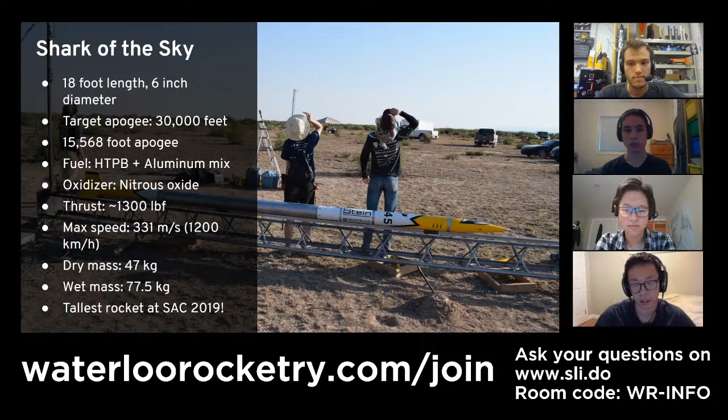At peak, the engine produces about 1,300 pound thrust, which gives it a max speed of just short of Mach 1 at 331 meters per second. It has a dry mass of 47 kilograms, which is when the rocket is empty without fuel or payload. And at launch, it has a wet mass of 77.5 kilograms. And just as a fun fact, out of over 100 rockets at Spaceport America Cup 2019, Shark of the Sky stood the tallest. So now I'll hand it off to Shirley to give you a more in-depth view of the rocket.

Yeah. So this is just to give you guys an overview of what sort of systems we have on the rocket, because we will be referring to the different systems we have on the rocket, and this is to help you visualize that. So at the bottom of the rocket, we have the fin can, which is essentially the assembly with the fins. We have the combustion chamber, where all the propulsion magic happens.

The feed system, which connects the oxidizer tank to the combustion chamber. So the oxidizer, nitrous oxide, flows through that section once it's time to launch, and we ignite the engine. The oxidizer tank holds the oxidizer. It is both a pressure vessel and also a structural component of our rocket.

The vent system. So this system is located at the top, and we use it to vent the system when we're filling, or if we need to make a launch abort, then we need to vent the system and safe it so that people can approach. The payload is, we will talk a bit more about it, but it is a science experiment, and we have a really interesting one for this year.

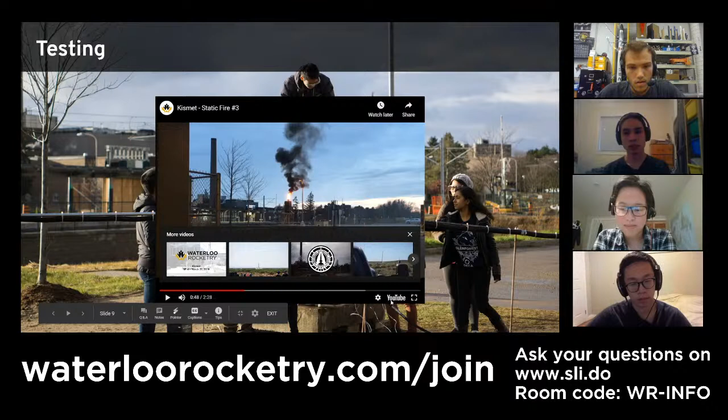Roman, just let me know when you're done playing the video, because there's a bit of a delay between what I'm seeing and what everyone else is seeing. Okay. Next slide, please.

Open injector valve in 5, 4, 3,

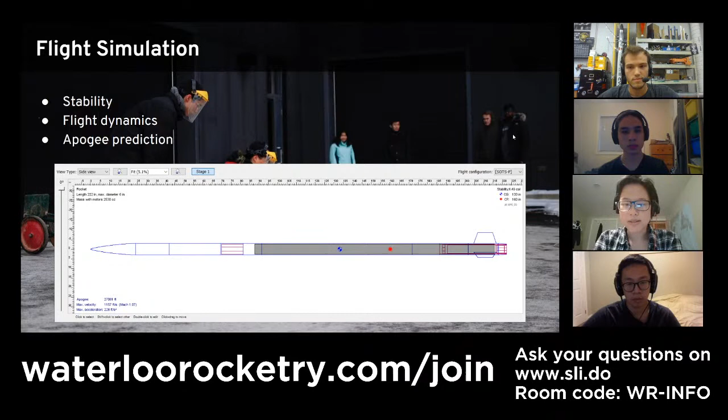Lastly, apogee prediction. So as Ryan touched on earlier, apogee prediction is a really important judging criterion for us at competition. And there are a lot of parameters that can affect this. For example, the weight of the rocket, the weight distribution of the rocket, the aerodynamics of the rocket, and thrust characteristics. And next slide, please.

All right, let's start talking a bit about the projects that we have in store for the year. First up, Airframe. So the airframe is just a term we use for the structure of the rocket. This includes the structural members and also the shell of the rocket. So one of the projects that we're working on this year is the Ox Tank Aft Skirt. So this is essentially a project that allows us better access to a section that has a lot of mechanical components and assemblies that we want to be able to access while the rocket is on the launch tower.

So here I have a picture of the CAD. So in this section, this is some CAD for the feed system, which was shown earlier in the diagram of the whole rocket. And this connects the ox tank, the oxidizer tank, which is on your left, to the combustion chamber, which is on your right. And the ox tank aft skirt is what goes around this and connects the two sections together. We also have a variety of composite parts that we're working on this year.

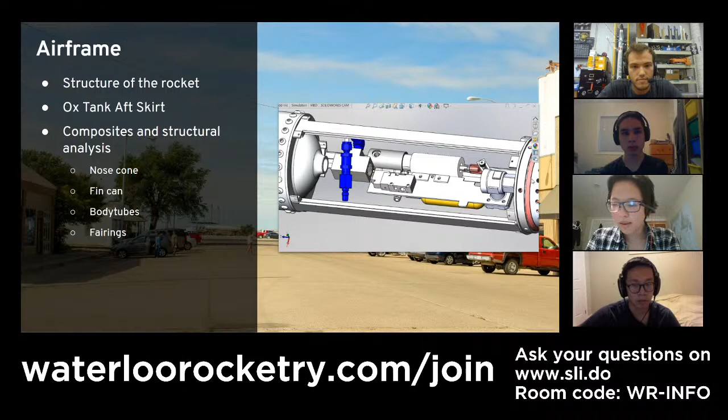Some other things that we are working on are the fin can, the body tubes, which are essentially the shell of the rocket. They are both structural and have aerodynamic purposes, as well as the fairings, which are non-structural, but help to streamline the section that is shown in the picture. Roman, do you mind? Next slide.

Okay, electrical. So in the past few years our electrical subteam has grown significantly. We now have various systems both onboard and offboard the rocket. So some examples of onboard electrical systems are RocketCAN, which essentially uses a CAN protocol for all of our electrical systems that are on board. Our payload has a number of PCBs and electrical systems.

Offboard, we have data acquisition, which is really important, especially for testing. We have our remote launch control system, RLCS. This is essentially the system that allows us to launch the rocket at a safe distance. And just to highlight some of the systems that we have on board, in the picture you can see that small board on the left, that's mini sensor board. So that's a board that contains a suite of sensors that will record and log data throughout the flight of the rocket.

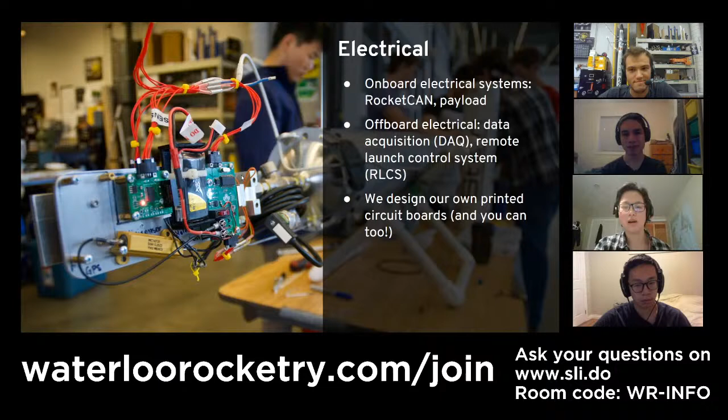So lastly, all of our PCBs are designed... Okay, thanks. All of our PCBs are designed by team members. And sorry, PCB stands for printed circuit board. And we will be having tutorials to teach you guys the skills to make your own. Okay, next slide. All right. Thank you, Shirley.

Now I want to talk a little bit about our payload. Shirley mentioned it. We do have separate electrical boards that go in the payload, but what the payload...

Roman, you're muted. I'm not. Oh. Roman. Sorry, guys. I have two mute buttons. I was going through on the stream, but not on our calling app. All right. Oh.

So what the payload is, it's essentially the cargo of our rocket. At competition, we get awarded extra points if we actually have a functional experiment that flies on, and that's what the payload team actually builds. This year, it's really cool. We're doing a particle physics kind of material science experiment. As you can see there, we're analyzing the material properties of boron nitride nanotubes and metal oxide coatings for the SDL payload challenge.

And essentially, what that means is that we are testing these two different types of materials, the boron nitride nanotubes and the metal oxide coatings. We're actually testing how well they insulate against ionizing radiation. And that's relevant to space because there's a lot more ionizing radiation out in outer space. Those ionizing radiations can interfere with electrical systems, so it's important to have some sort of protection for them.

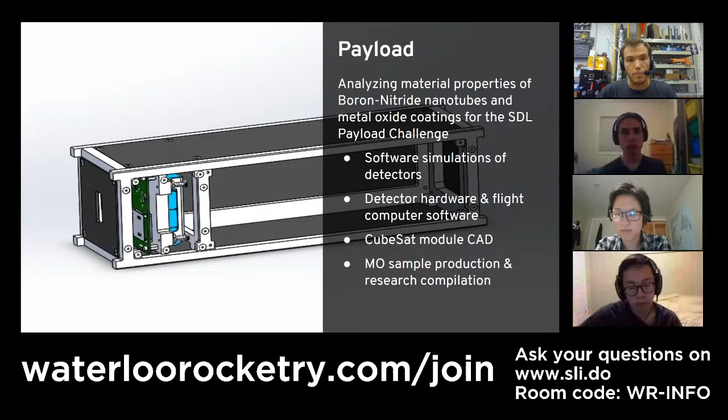It's also for the SDL Payload Challenge, which is like an event that runs alongside the rocketry competition. So teams all send up experiments, and the best experiments that are judged will get some prize money as well associated with it.

Next, I'd like to talk about our recovery sub-team. So recovery, as we talked about, is the stage of flight where everything comes back down to Earth. We've flown to 30,000 feet, the engine is burned, the payload is gathering data, and suddenly we're at the top of our flight and we're going to start coming down. Well, we're not going to come down and crash into the ground and become 2,000 pieces. We're going to deploy our parachutes so that we bring everything down in one piece.

Now, in the past, we've been using 2 parachutes, and that's part of a rule in our competition that we have to have 1 small parachute at the top of the flight and 1 large parachute closer to the ground that deploys. This year, a really exciting project that we're doing is we're developing a new reefed recovery parachute, and what that should do is eliminate essentially one of the parachutes that we have to have inside of the rocket, because the reefed parachute will act as 2. How it will do it is by being constricted to a small shape on deployment, so it'll act as the small parachute, and then it'll be allowed to release and expand to the full size at a lower altitude.

Of course, with this, parachutes are really complicated. Aerodynamics is very complicated, and parachutes especially are very hard to simulate and predict. So we're doing a lot of testing on this new parachute system to make sure that we know exactly how it's going to behave when we deploy it in flight. So that's that truck test rig. That's building an actual assembly to mount on top of a pickup truck so that we're actually going to be able to deploy some prototype chutes out the side of the pickup truck and get data about the drag characteristics and about the forces that they pull on deployment as well.

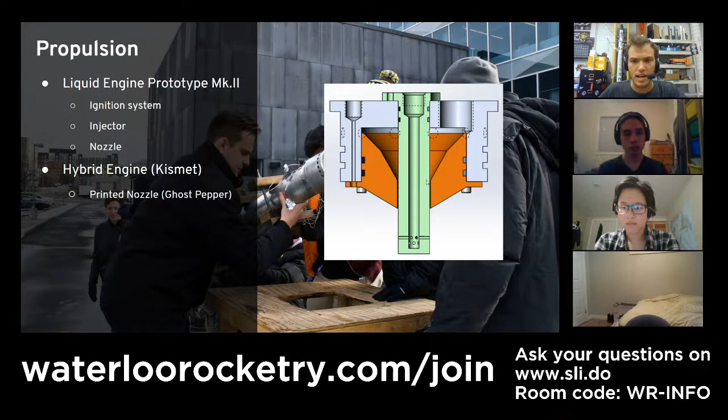Now we have a brand new test site, which is in the middle of a field. We bought a shipping container last year, modified it, ripped the floors out, put in metal flooring, put in an engine test stand, put in some hardware to mount our tanks, put in all of our plumbing system, and then we got it moved out into a big empty field where we can do higher risk engine tests safely.

So some of the ongoing projects with our test site are the tank heating system. We need to keep our oxidizer tank warm during our tests because we're often testing in the winter, but when we go to launch, we're in the desert. So in order to simulate that desert environment, we have traditionally used a hot water jacket around our oxidizer tank to keep it warm. So we need to make a solution for that now that we're out in the middle of a field and don't have access to hot running water.

Additionally, we're working on making a stand to actually hang our large oxidizer tank that's used by our hybrid engine. You might be able to see right behind me, there's our large oxidizer tank hanging there, or lying down there on the shelf. So we need to be able to hang that up vertically so we can measure the mass of it while the engine's firing. And otherwise, we are improving our test stand.

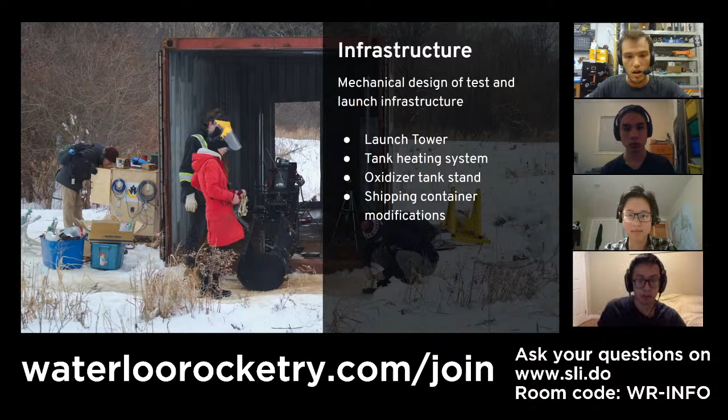We're improving the test stand, making modifications to it to get it ready for our next tests. Another infrastructure project, which you saw in that previous video, was actually our launch tower. There are no current ongoing projects with the launch tower, but as we get closer to competition, that kind of work to get the launch tower ready for competition 2021 will get underway.

And now to Jacob with our tests.

Yeah, thanks, Roman. So we just went over the propulsion system as well as our test infrastructure, and the whole reason that we have this sort of infrastructure is so that we can safely test the engine on the ground. Unfortunately, in Canada, it's very difficult to actually launch a rocket. There's a very long process in order to actually get permission to do that, and so we're unable to do flight tests of our rocket before we bring it down to competition.

So we want to make sure that as much as possible, we can test it on the ground, test things in simulation, and run calculations so that we can be very confident that when we get down to New Mexico, we can launch our rocket safely and successfully.

The two main tests that we do on our engine on the ground are called cold flow tests and static fire tests. Cold flows are named cold flows because we don't actually fire the engine. In most cases, we will just pressurize it using carbon dioxide or nitrogen instead of our oxidizer, nitrous oxide. Both carbon dioxide and nitrogen are inert, they're non-oxidizing, and we don't need to worry about any risk of explosion or combustion when we're using those.

They do, however, in many cases have very similar properties to nitrous oxide in terms of pressure and density, so we can use them to test our pressurized systems, test the fluid dynamics properties of components like the injector, and also go through a full run through of our test procedures to make sure that we're good to go when we actually want to fire the engine.

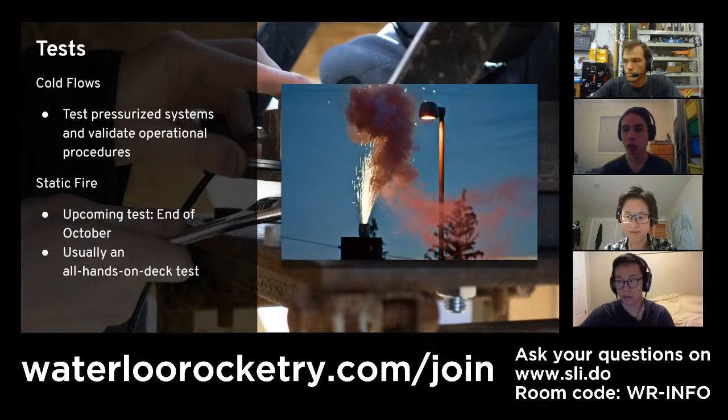So I'm going to switch gears now and talk about our software systems. Similar to electrical and infrastructure, there isn't really one specific module on the rocket that the software subteam is responsible for. We have a bunch of different pieces of software, both on the rocket, off the rocket, and some that aren't even related to our technical development at all. The software team is responsible for working on all of these projects and making sure that everyone who wants to write code gets the reviews and help they need.

In terms of our software systems, we have a couple main onboard systems, and in most cases there's a lot of collaboration between the software team and the electrical team when we're working on these, because the electrical team, or in some cases the payload team, is responsible for designing and building the hardware that the code will actually run on. So there's a lot of overlap between our teams. Most of the people who work on the onboard electrical systems are on both the electrical and software subteams, and they do a lot of the electrical design as well as the coding. But there are definitely people who just prefer to do one or the other.

Our main onboard electrical systems are RocketCAN and Payload, which Shirley mentioned earlier. In terms of offboard electrical systems, we have RLCS, that's our launch control system, data acquisition or DAQ, as well as a system called St. Pat's, which is basically a transponder for helping us find our rocket, which we're not going to touch on a ton here.